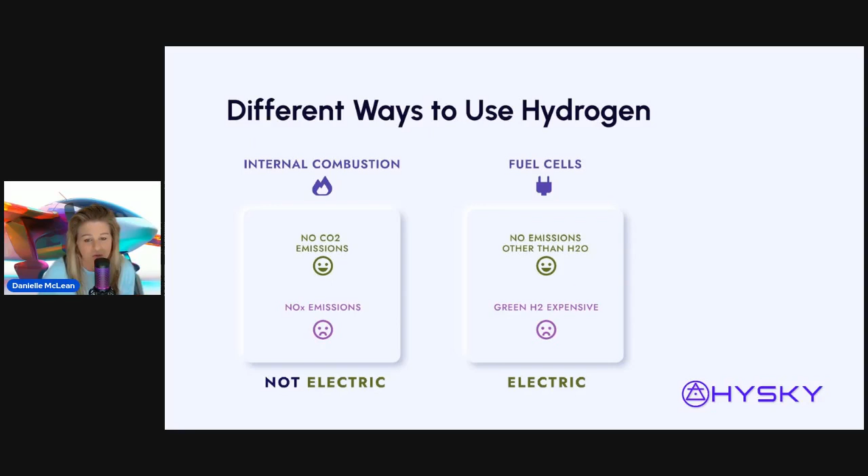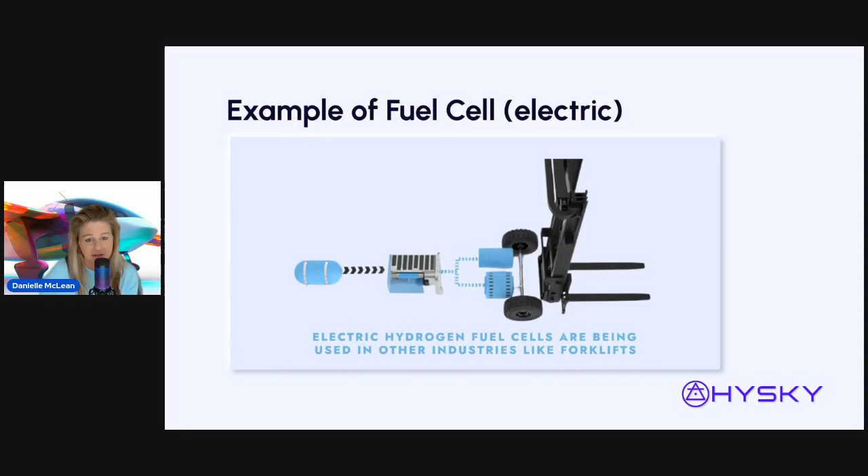Okay, this is the nerdiest part, the most in the weeds we're going to get in this presentation. This is also something I keep hearing come up that I've been saying for 5 or 6 years, and I'm going to harp on it: specific energy and energy density. Specific energy and energy density are two important but different properties used to describe the energy content of fuels and batteries.

Specific energy, aka gravimetric density - this is where hydrogen is really ideal. It has very high specific energy compared to jet fuel. It describes the amount of energy stored per unit mass. The units are measured in watt-hours per kilogram, or joules per kilogram. This is important when the weight of the energy storage system matters, such as in aviation. Higher specific energy means more energy for the same weight.

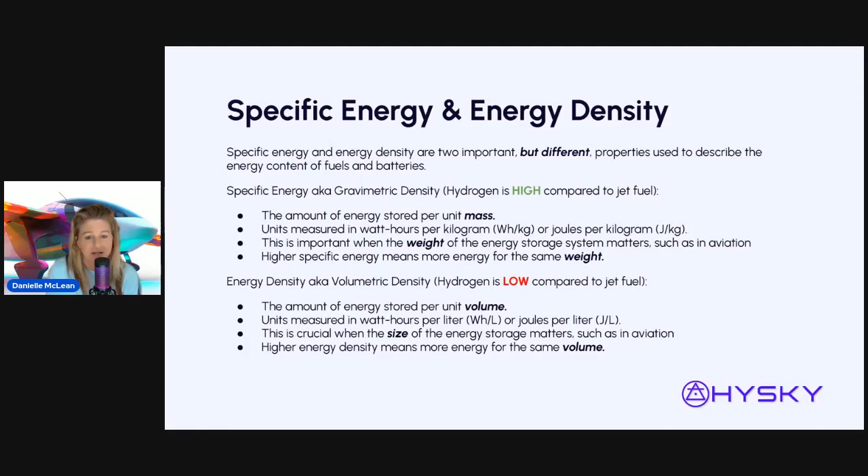Energy density, aka volumetric density - hydrogen is low compared to jet fuel in energy density. It describes the amount of energy stored per unit volume, measured in watt-hours per liter or joules per liter. This is crucial when the size of the energy storage matters, such as in aviation. Higher energy density means more energy for the same volume.

Okay, if you're a visual person, what that looks like is JP8, that's jet fuel - it's towards the top left. It is very high in volumetric density, which means you can store a lot in a small size. Hydrogen is low on that, which means you can't store a lot in a small size.

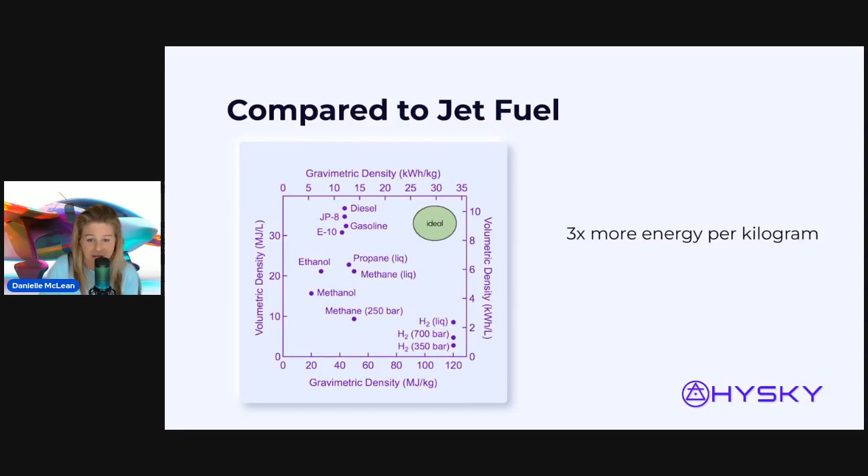However, hydrogen is very far to the right, in the lower right corner. I've never had to do this before without my cursor, so this is using a different part of my brain I'm not used to using. But hydrogen is to the right, so it's got high gravimetric density, but low volumetric density. It has 3 times more energy per kilogram than jet fuel, but it's harder to store that energy size-wise. What does it all mean?

Hydrogen is an excellent fuel for aviation, but it takes more space to store it than jet fuel. Don't say hydrogen has high energy density—that's technically incorrect. Say that it has high energy per kilogram, high specific energy, high gravimetric density. But technically, it's incorrect to say it has high energy density.

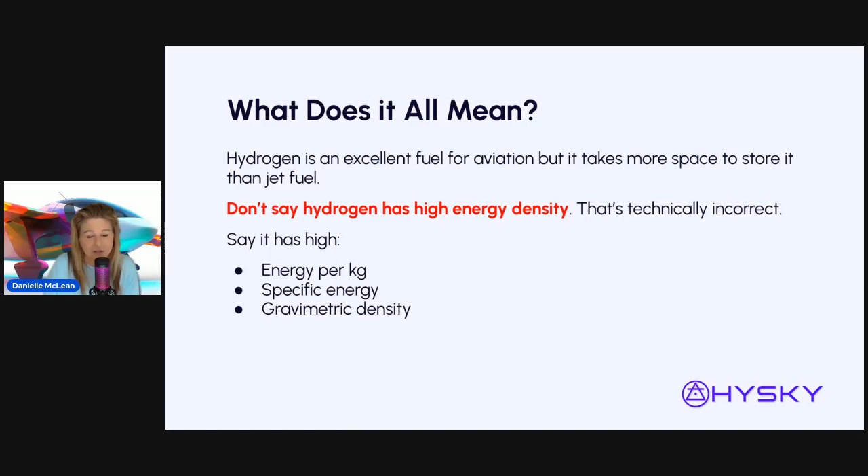Sorry to harp on you all for that, but it's driving me crazy because we keep doing it. We're trying to train young engineers, and they come to me all confused about this. And I hear all these industry experts saying it has high energy density. So let's try to keep that consistent and correct so we don't confuse the new engineers that want to work in the space. We need them.

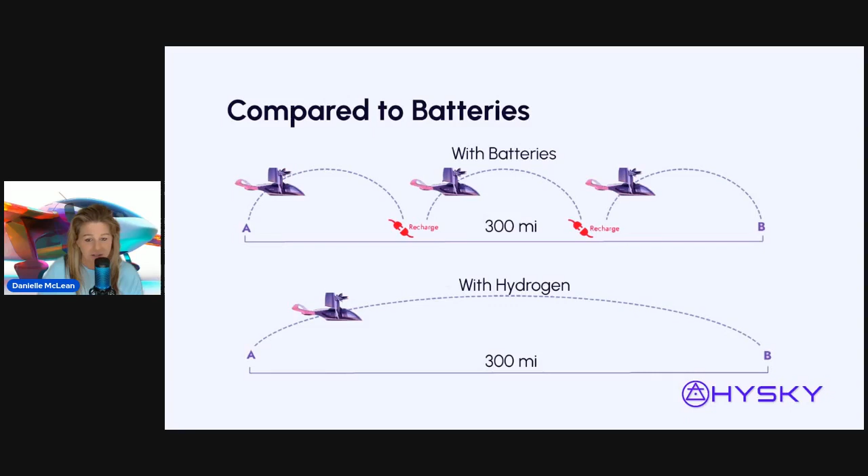So far, I've just compared to jet fuel. I could do another dive into the weeds on power density, but I'm going to save that for the hydrogen aviation course I'll talk about in a second. But if we compare it to batteries, just talking about specific energy, if you wanted to go 300 miles powered with batteries, you're going to have to stop and charge at least 2 times. You could do that same flight with hydrogen, A to B, not recharging. So that kind of gives you a visual of why hydrogen is better than batteries. I've already told you why it's better than jet fuel, although there are some challenges.

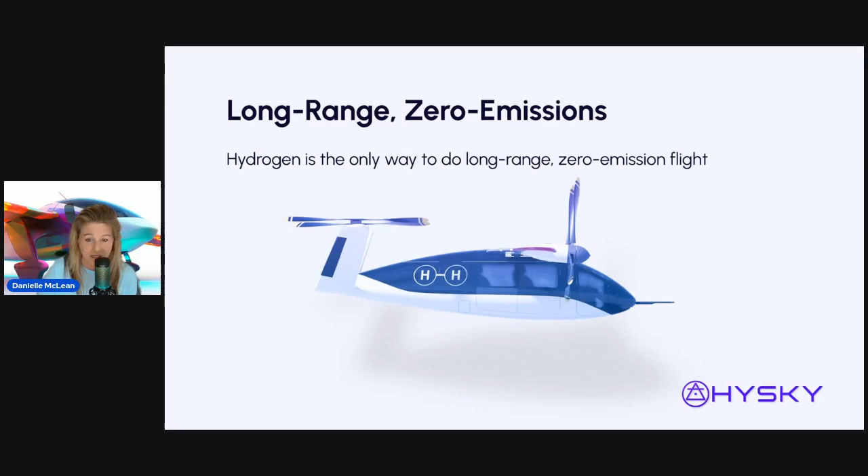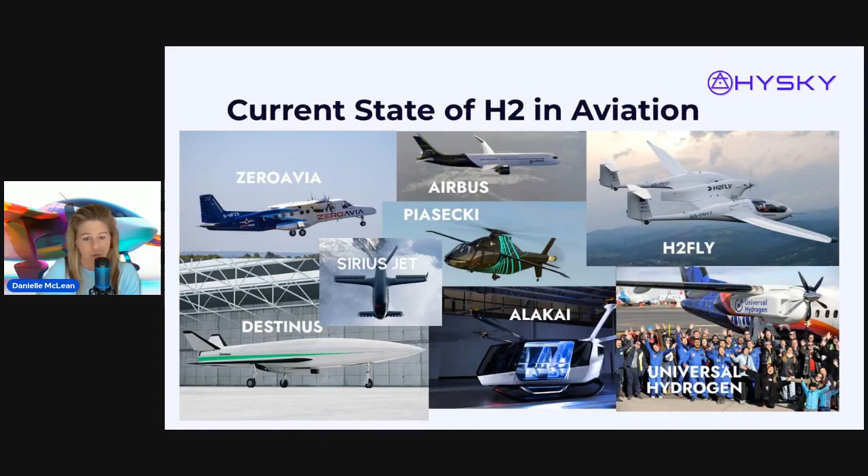The moral of the story is hydrogen is the only way to do long-range, zero-emission flight. How you use that hydrogen, whether you combust it or put it in a fuel cell, depends on what you're trying to do. As for the current state of hydrogen aviation, I know that all of these aircraft have flown with hydrogen except for one—that doesn't mean they haven't, I just don't know about it yet. I'm having to add people to this list all the time. These aren't counting hydrogen-powered drones; there are many hydrogen-powered drones coming online and flying with hydrogen as well. But these are passenger aircraft that have flown with hydrogen. Like I said, all of them but one have flown.

And I had to use my mouse, which is also awkward.

There was lightning involved. It was caught on video. Today, we have carbon fiber, fireproof materials, quick release. This was the shortest I could make this, but there are so many reasons and evidence to show that hydrogen did not cause this explosion. In fact, we flew with hydrogen many times before this event and many times after.

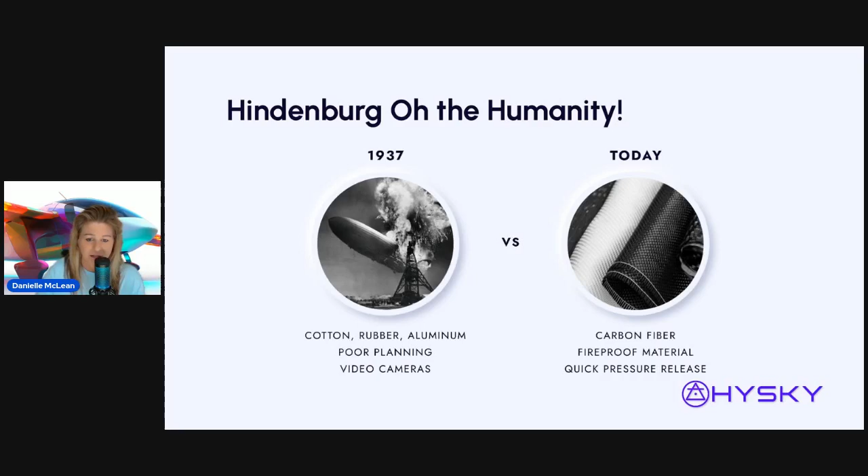Like I said, it was caught on video, so it went viral. It was like the clickbait of its time. And there was also a significant amount of propaganda involved. I personally own 2 books that go into all of the evidence, technically and politically, of why hydrogen kind of got the bad rap that it has. I highly recommend you dig into those. There's documentaries on YouTube, and I just learned there's a new one that PBS is putting together on hydrogen and the Hindenburg.

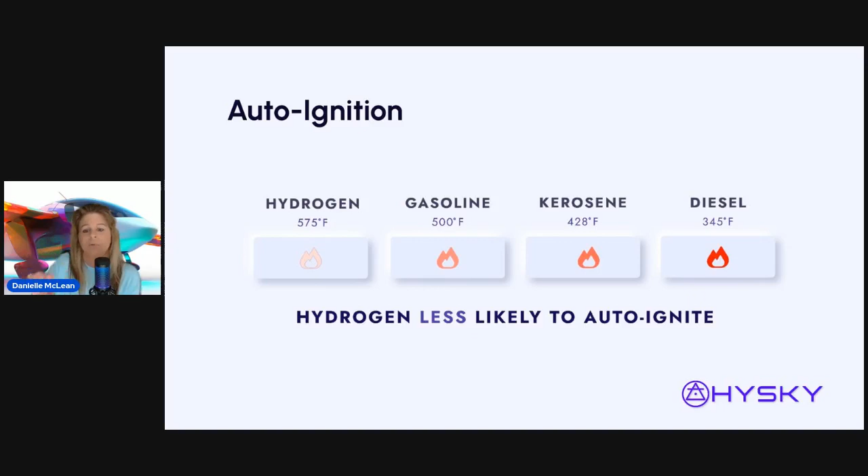So if we talk about the safety of hydrogen, the auto ignition temperature of hydrogen is actually higher, which makes it more safe than gasoline, kerosene, and diesel. We're at 575 Fahrenheit. So what that means is, how likely is it to auto ignite? Kerosene, which is jet fuel, is more than 100 degrees lower, which makes it more likely to auto ignite. That property makes hydrogen safer.

Dispersion. Hydrogen's 14 times lighter than air, which is why we saw it used in a dirigible in the Hindenburg. But this property makes it safer than other fuels because as soon as it leaks, it evaporates so quickly, it disperses. Where other fuels that are more dense, they're going to collect and pool, which makes them more likely to go boom.

I'm not going to say that hydrogen is safer than other fuels that we use in aviation. Some properties make it safer. If you compare all of the properties, they're about the same. That's the overall takeaway, that they're about the same.

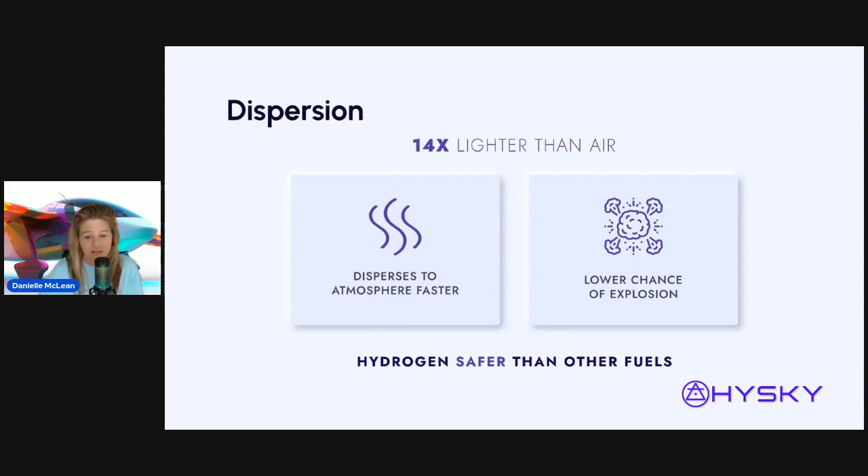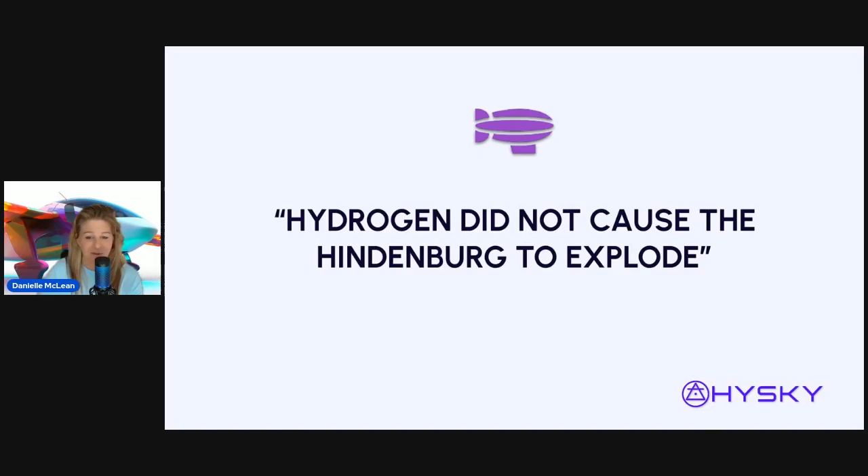So why now? The rising cost of jet fuel is projected to double in the next 25 years, and this poses a significant risk to the aviation industry's financial stability.

In 2024, it's about $2.50 per gallon. In 2050, $5 per gallon. As a passenger, that's going to make our tickets more than double. I don't like that, and I'm sure aviation and airlines don't like that either.

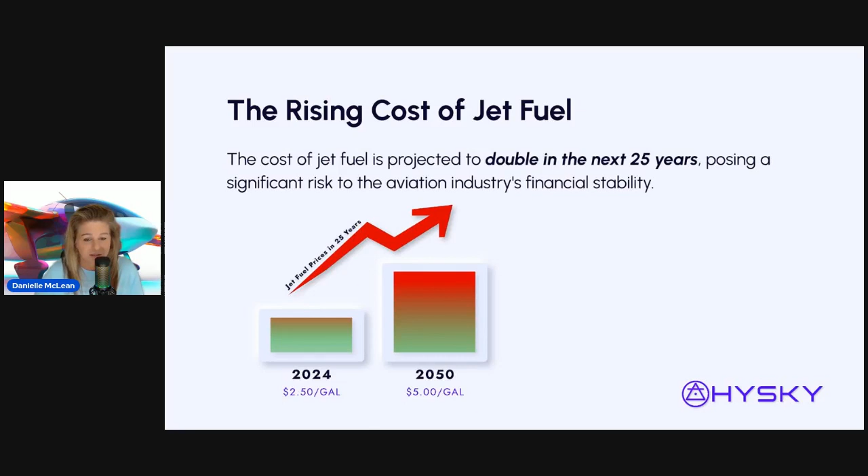However, the cost of clean hydrogen, which, by the way, I've started calling clean hydrogen instead of green hydrogen - and if you want to know the difference, that's another reason to take our course - the cost of hydrogen is expected to decline and reach $1 per kilogram. At least that's what the DOE's target is. That makes it a very cost-effective alternative to jet fuel.

You'll see on this picture, I have $15 per kilogram for hydrogen. A lot of people ask me where I get that number. I just looked it up about 6 months ago, maybe longer - I Googled how much hydrogen costs at the pump in California if I wanted to refuel my Toyota Mirai, because they have hydrogen refueling stations. I think today it's like 30 something dollars.

So hydrogen is a commodity. It fluctuates greatly. But at the time I made this slide, it was $15 per kilogram. It's higher than that now, and that's not even talking about liquid hydrogen. But that just makes that arrow even sharper, that it's going to come down to $1 per kilogram. So yes, hydrogen is expensive, but it's coming down. Anyway, if you want that $15 per kilogram number, just look up how much hydrogen costs in California at the pump - that's what I do. That number does not represent today, though.

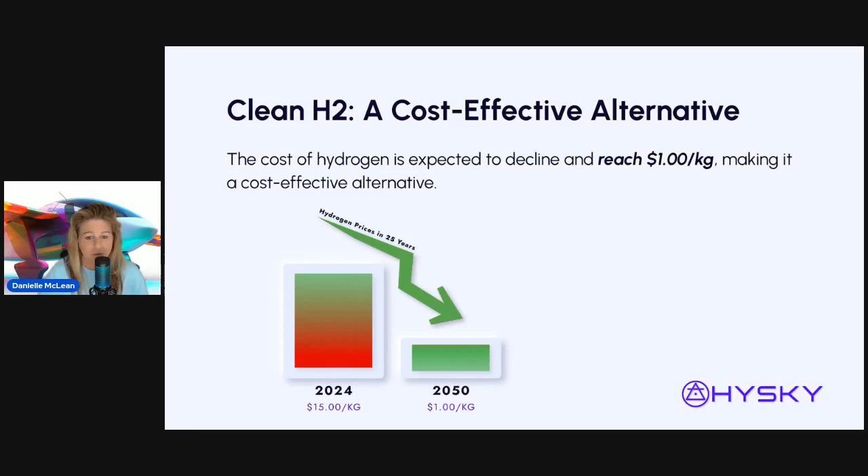20% of global energy will be hydrogen by 2050. Just really think about that, 20% of the world's energy will come from hydrogen by 2050. And as countries work to diversify energy sources and lower emissions, hydrogen creates a massive opportunity of $2.5 trillion in revenue by 2050. It's not a matter of if hydrogen, it's when hydrogen, and it's definitely now.

And it's not even a question of if hydrogen for aviation, it's a question of when hydrogen for aviation. And I very much believe, and HYSKY, we all believe that SAF plays a role in that. So it's not SAF versus hydrogen, it's when hydrogen, it's SAF then hydrogen. I hope that's been the consistent message throughout this summit, or will continue to be.

So I mentioned earlier the DOE's target, the 1-1-1, or the hydrogen shot. What the hydrogen shot is, it's the DOE's target to get to $1 per kilogram in a decade. I think they made this 2 years ago, so 8 years we should see this, and they're doing everything they can to make that happen. What that means for aviation is it creates an $85 billion market.

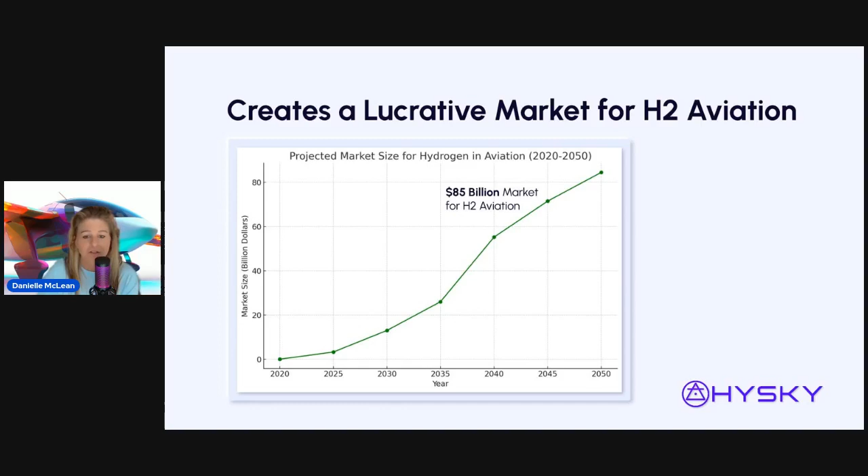HYSKY made this chart. If you're interested in how we got to these numbers, because it's a little bit higher than others, this is annual, by the way, annual market. Reach out and we can dive deeper into how we got these numbers. But I think it's more accurate than other numbers we've seen based on the cost of fuel. Yes, there are infrastructure costs, but assuming the infrastructure is in place, then this is what we can expect.

So very exciting time to be alive. The US government is investing heavily into hydrogen, as they should be, because we're going to see global energy shift to hydrogen. And so they've just allocated $8 billion to 7 hydrogen hubs.

There was a large, I'm going to call it a competition, I don't know if they officially called it that, but it was a competition in my eyes. There were like 77-ish, don't quote me on that number, but in the 70s, different hubs around the US that competed for this $8 billion. 7 of them won, so each of these won about $1 billion each. And they're in negotiations right now. Hopefully we'll see all of that come to fruition, but they're probably going to get it.

In March, HYSKY put together the world's first hydrogen hub summit, Meet the Winners. It was the first time that we had leadership from all 7 of these hubs together, and how much information they shared with us and how much they talked about aviation was very exciting.